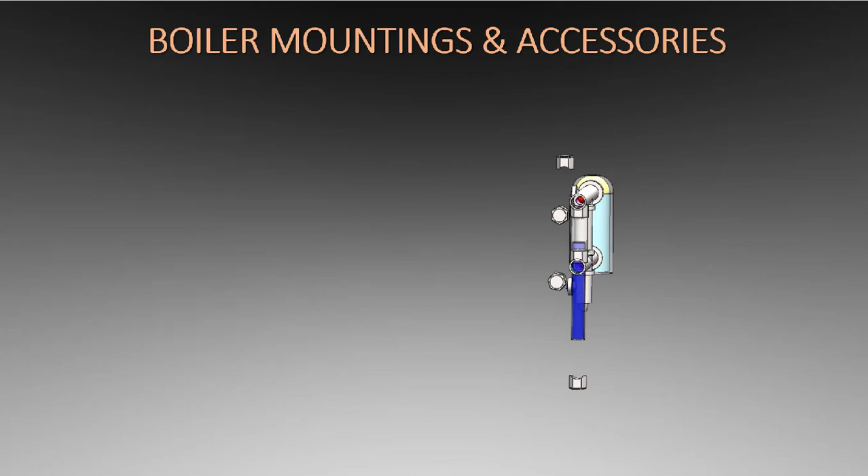We have already learned the uses of some of the mountings, and today we'll learn boiler mountings, boiler accessories, and one of the accessories will be discussed today, which is the water level indicator.

Let us define mountings and accessories first. Mountings are the installed devices for the safety of the boiler and also for the control of the boiler. Notice the two key words for mountings: safety and control.

Examples of boiler mountings are pressure gauge, water level indicator, fusible plug, etc.

Boiler accessories are the devices for efficient operation and smooth working of the boiler. Examples of boiler accessories are superheater, economizer, air preheater, etc.

So for mountings, it is safety and control, and for accessories, it is the efficiency or performance of the boiler. Mountings are required for safety and control, while accessories are required for efficient operation or performance of the boiler.

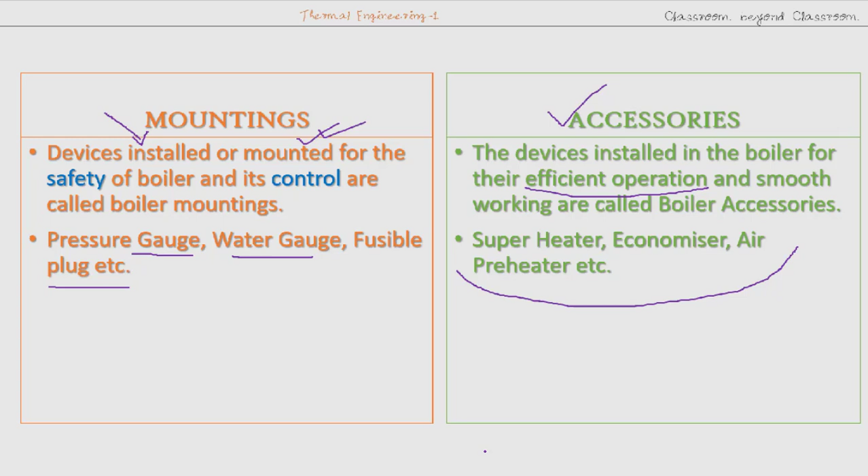Boiler mountings can be classified in two ways: boiler mountings for safety and boiler mountings for control. For example, water level indicator. Another is the safety valve.

Another example of boiler mountings for safety is the combined high steam and low water safety valve. If the level of steam increases and the level of water decreases, that will be indicated by this safety valve. This is a special safety valve for a boiler.

Fusible plug. These mountings are very essential for the safety of the boiler.

Other mountings for the control of the boiler include the pressure gauge. The pressure gauge indicates the pressure inside the boiler, and by monitoring the pressure, proper decisions can be taken.

Also, the junction or stop valve is a mounting for control. Similarly, the feed check valve is a non-return valve which allows water to enter the boiler but does not allow water to escape from the boiler. Blow-off cock and manhole are also mountings for control.

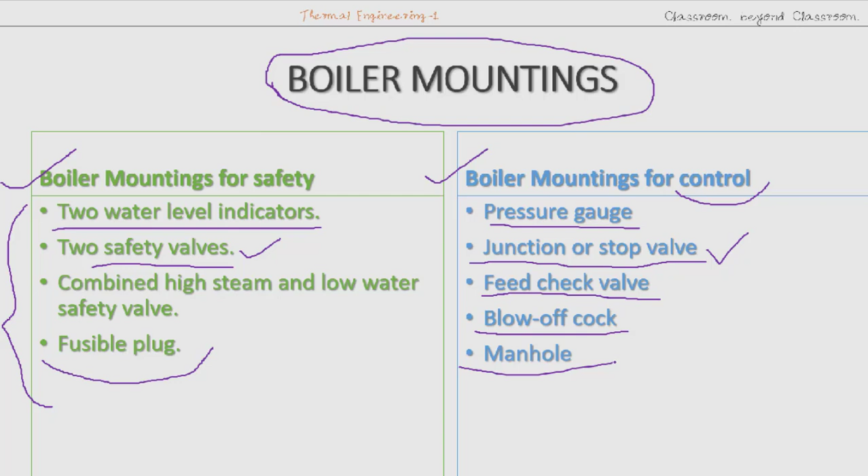So boiler mountings are for safety as well as control. All these fittings or devices are called boiler mountings.

Now boiler accessories. Examples of boiler accessories are the superheater, which produces superheated steam, and the economizer, which is used to supply hot water to the boiler as feed water by using the waste heat of the flue gases. Similarly, the same waste hot gases are used to heat the air which is supplied to the furnace.

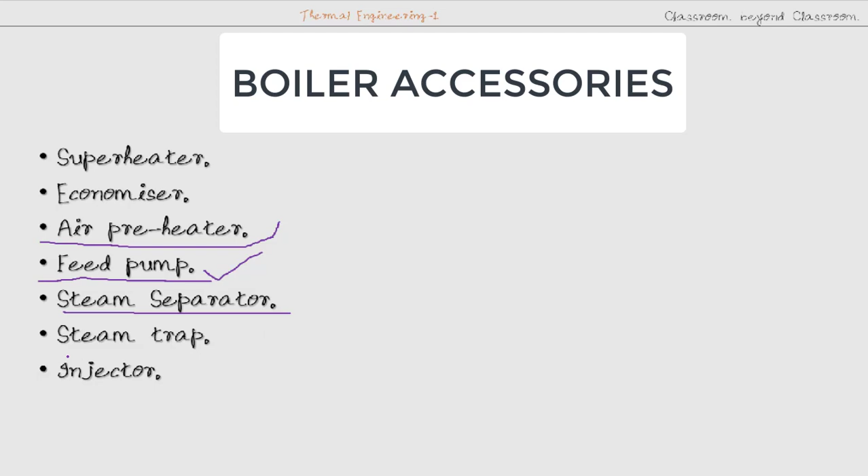The feed pump is used to pump water at high pressure into the boiler, at a pressure more than the boiler pressure. Other accessories include the steam separator, steam trap, and injector.

Let us understand the working of a water level indicator with the help of this 3D model.

This is the boiler plate to which the water level indicator is attached. The water level indicator consists of two horizontal tubes: one is for the flow of steam to the glass tube, and the lower tube is for the flow of water to the glass tube.

Both these horizontal hollow tubes are generally made of gunmetal. This vertical tube, also a hollow tube, supports both horizontal tubes, and it extends below, which is for draining water from the tubes if necessary.

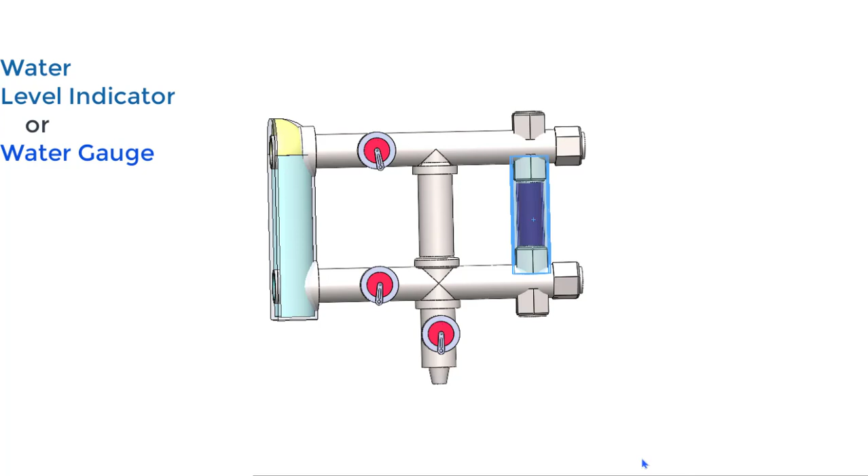This tube actually consists of two tubes. The inner, smaller tube is the glass tube, which contains the water as well as the steam. The outer tube is also made of glass, and it is the protective tube which protects the inner tube from any breaking, damage, or accident.

You can see there are three cocks: one on the steam tube and another cock on the water tube. The lower cock is to drain out the water from the tubes so that sediments and mud can be cleaned by blowing off the water from time to time.

At this position, both the water and steam cocks are closed, so water and steam cannot flow into the pipes.

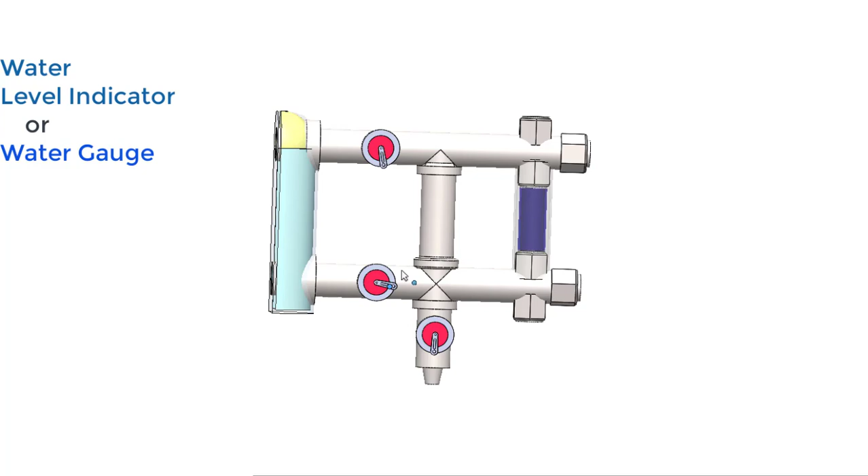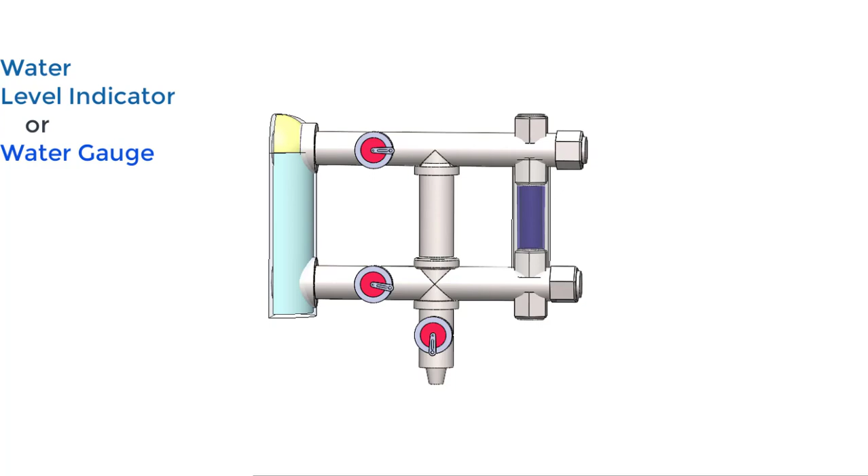Now both the water cock and the steam cock are open. You can see the steam and water can flow through these tubes to the glass tube. If both these cocks are open, then the level of water indicated by the glass tube will be the same as the level of water inside the boiler. At this time, the lower cock must be closed, otherwise the water will be drained out of the tubes and the level shown by the glass tube will not be exactly the same as that of the boiler.

These are the screw cocks which close the pipes at all the ends.

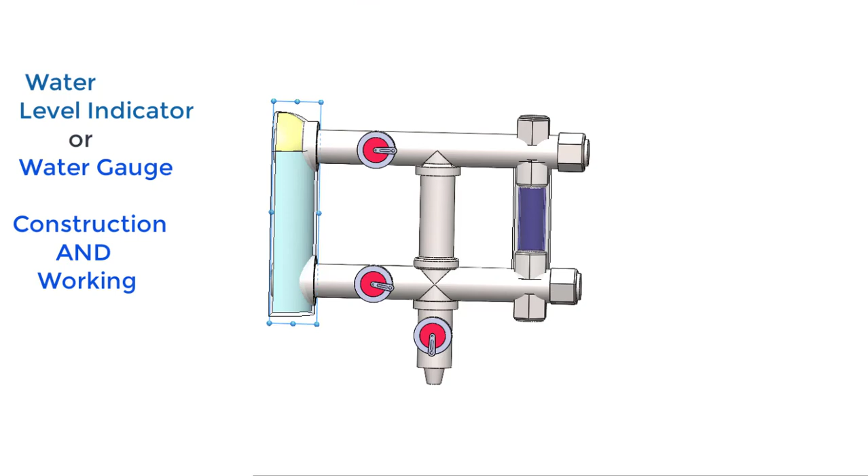Now let us see the cut section view of this water level indicator. Both the cocks at the water pipe and steam pipe are open, so the steam and water can enter into the pipe and ultimately go to the glass tube, and the water level will be the same as that of the boiler.

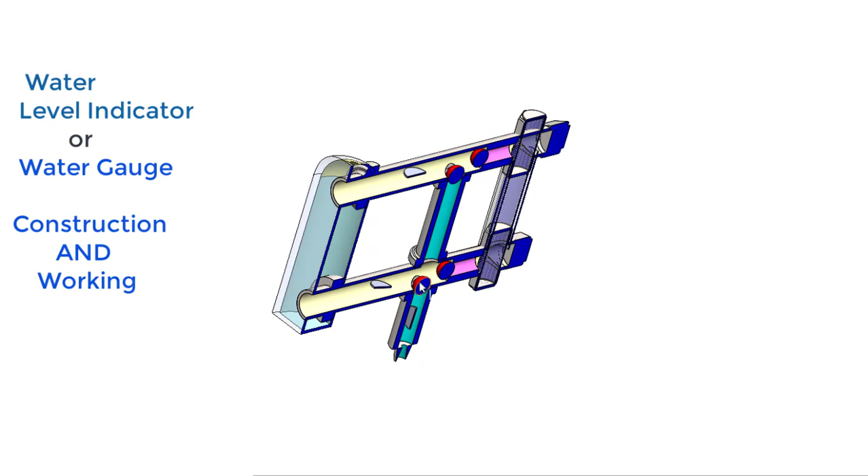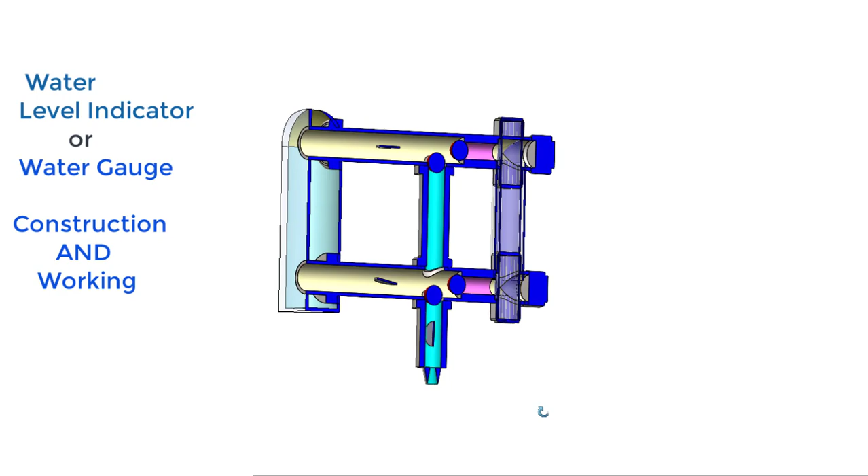There are two hollow steel balls, this one and this one, and under normal conditions they rest at this position. If the glass tube is broken, then these two steel balls will rush to this position and stop the flow of water and steam to the glass tube. So this is how a water level indicator works.

The function of a water level indicator is to indicate the water level inside the boiler. The water level inside the boiler cannot be seen because the water and steam are enclosed within a closed vessel. Therefore, a device is required to monitor the water level inside the boiler.

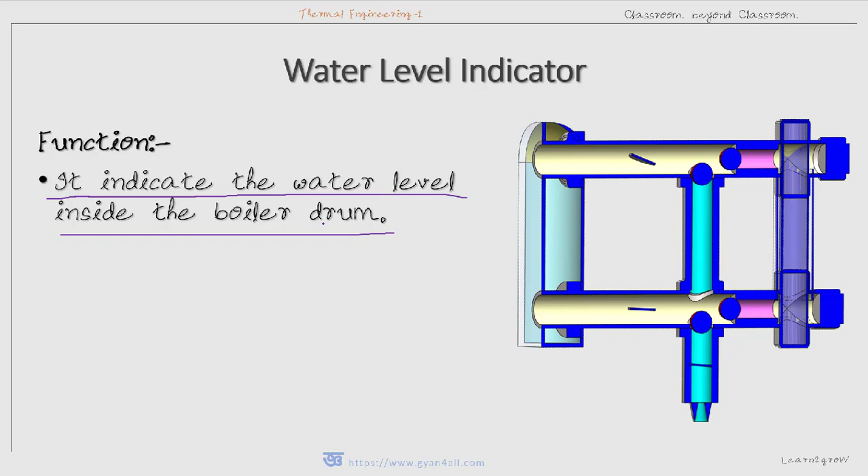The function of the water gauge is to indicate the level of water so that the attendant, called the boiler attendant, can regulate the supply of feed water into the boiler to maintain the correct water level. Normally, two water level indicators or water gauges are fitted in front of the boiler.

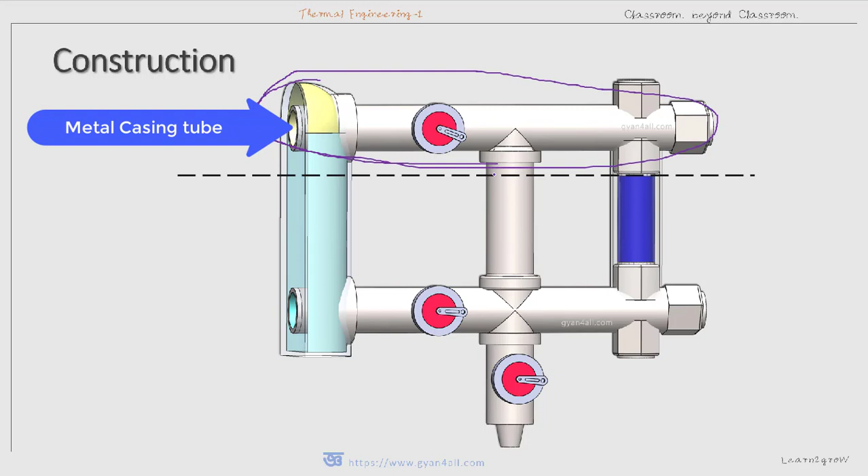Now let us discuss the construction of the water level indicator. It consists of two horizontal metal casing tubes, upper and lower tube. This is the upper horizontal tube and this is the lower horizontal tube. The upper tube is fixed to the steam space and the lower tube is fixed to the water space.

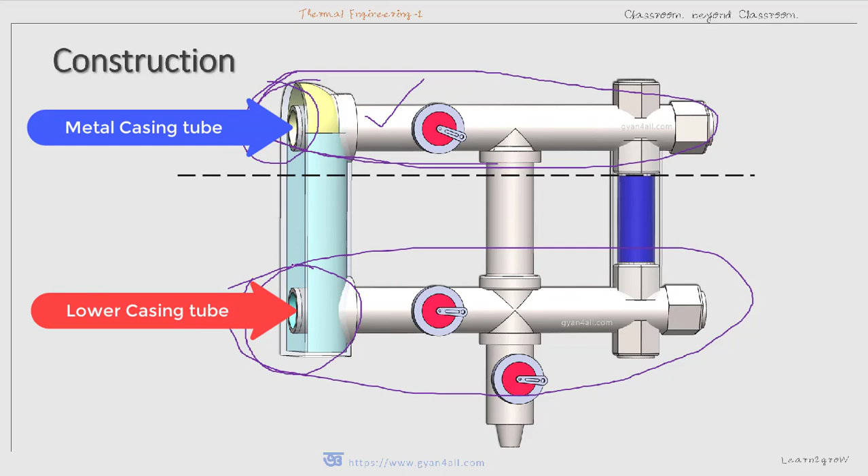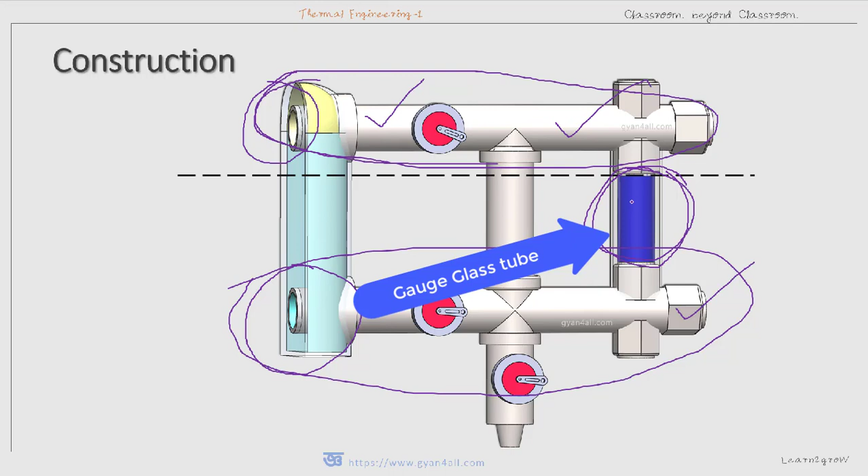There is one gauge glass tube, having a guard cover, fitted between two hollow gunmetal casing tubes. These are made of gunmetal, and this glass tube is the gauge tube. The inner one is the gauge glass tube and the outer tube is the protective tube.

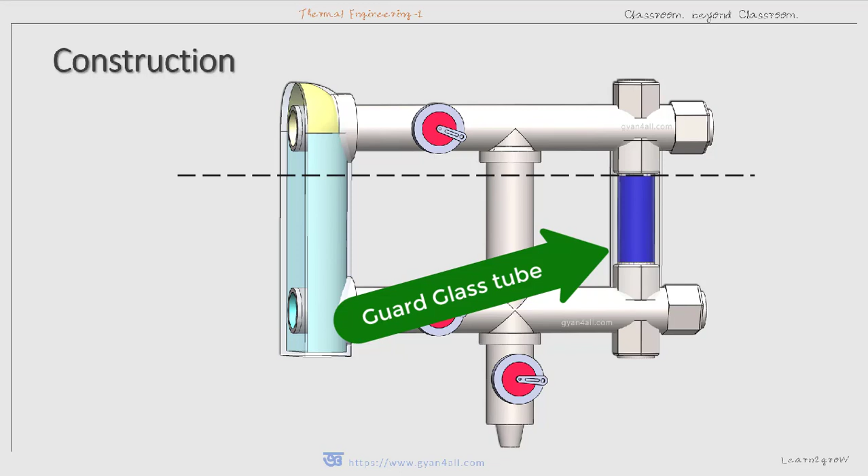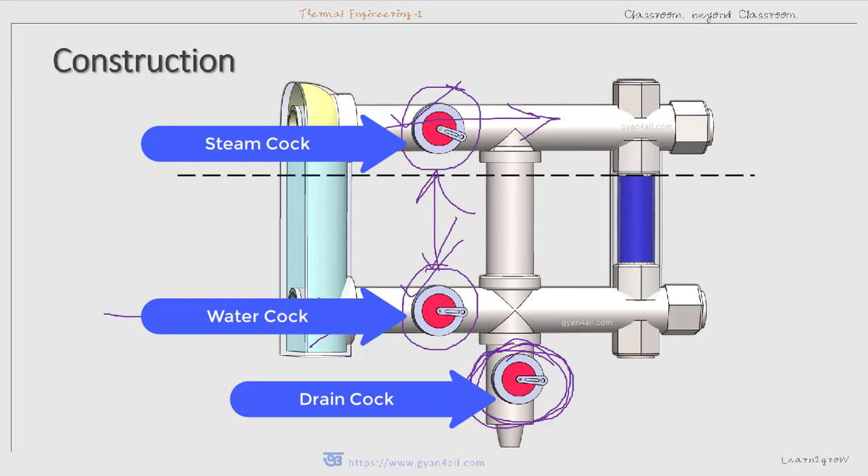The water level indicator has three cocks: cock 1, cock 2, and cock 3. The upper one is called the steam cock, the lower one is called the water cock, and the bottom-most one is called the drain cock. These two cocks control the passage of steam and water, and the third one is used to drain out the water from the system to clean the tubes periodically.

This is the boiler plate, part of the boiler water drum. And this is the level of water inside the boiler as well as inside the inner glass tube. The water can enter through this tube and steam can enter through this tube.

These two tubes made of gun metal are called the casing tubes, hollow casing horizontal tubes.

These are the three cocks C1, C2 and C3. C1 is for controlling the flow of steam. C2 is for controlling the flow of water to the glass tube through the hollow gunmetal casing tube, and cock C3 is to drain out the water for cleaning the tubes so that mud and sediments cannot deposit inside the inner glass tube.

This one is a metallic hollow tube which supports both the horizontal tubes, and this is also a hollow tube, through which water or steam can flow from the upper tube to the lower tube or lower tube to upper tube.

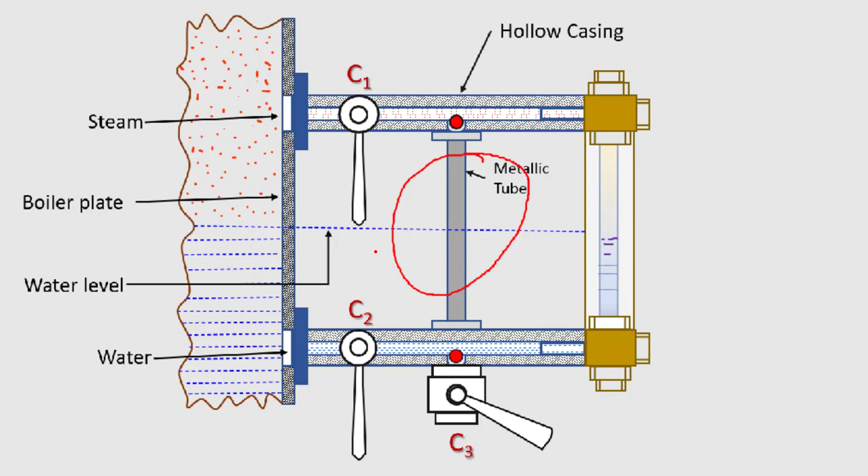Outer tube is called the guard glass tube, which protects the inner glass tube. Inside are two hollow steel balls which generally rest in this position, and in case of breaking of this tube, the steel balls take a new position, stopping the flow of steam and water to the glass tube. The inner glass tube is also called the gauge glass tube, through which we can monitor the level of water inside the tube.

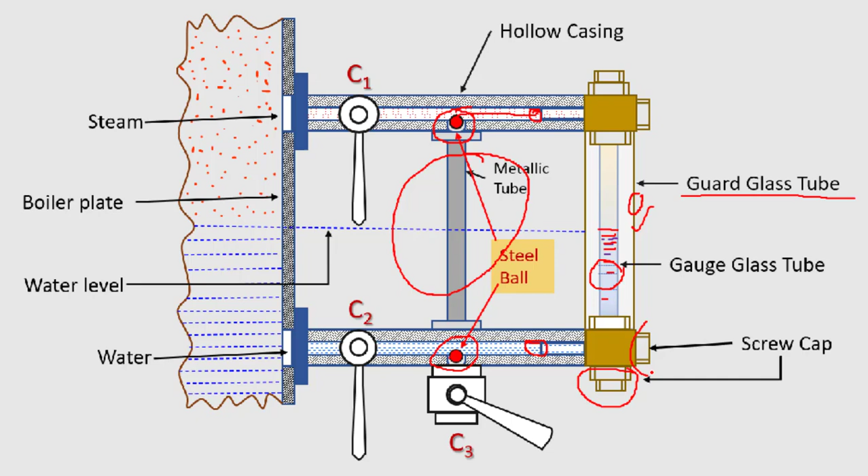The gauge glass tube indicates the water level inside the tube, which is also the level of water inside the boiler. These are the screw caps to close the flow of water from the tubes. Steam comes from the upper tube and water comes from the lower tube. The yellow color represents the steam, and the light blue color represents the water.

During operation, and for observation of water level in the boiler, the steam and water cocks are kept open and the drain cock is closed. C1 and C2 must be open and C3 must be closed for operation or observation of water level. If that is so, the water level inside the boiler will be the same as seen in the gauge glass tube.

The drain cock is opened at regular intervals to discharge water, to avoid accumulation of mud or sediments in the path from boiler to glass tube.

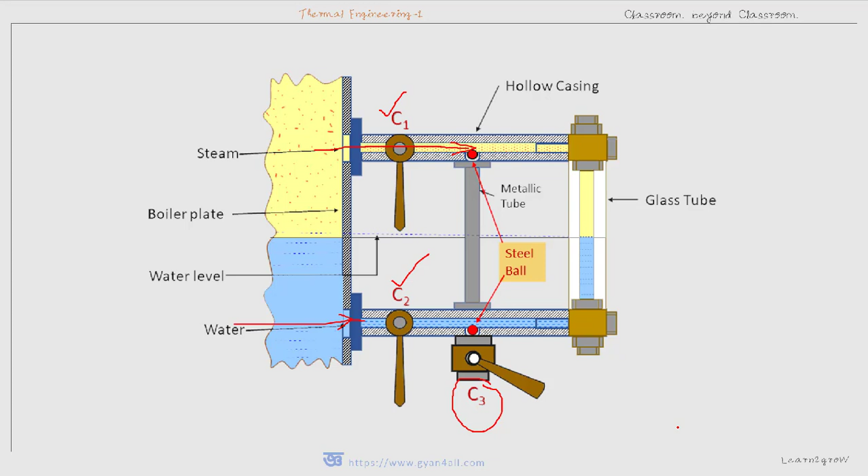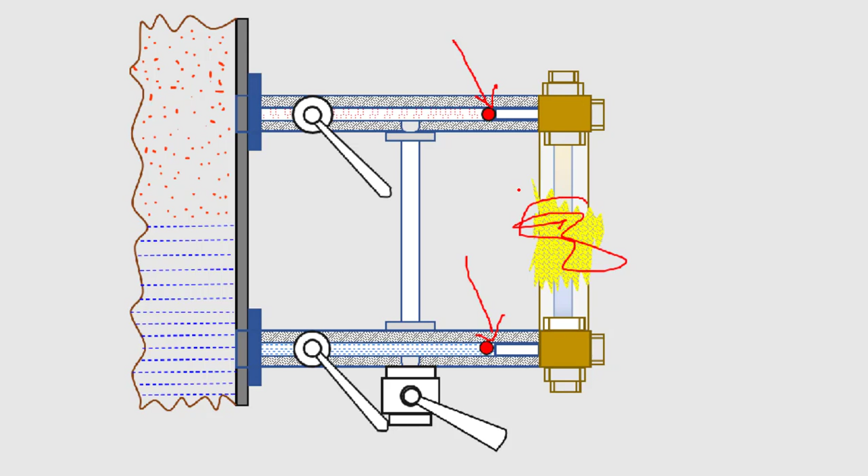In case the glass tube is broken, these two steel balls will take a new position. That means the two small metal balls inside the upper and lower metal casing tubes rush towards the glass tube, and the steam and water supply are shut off to the glass tube. If it is broken, due to the pressure difference, the ball will take the new position in both passages, for steam as well as water.

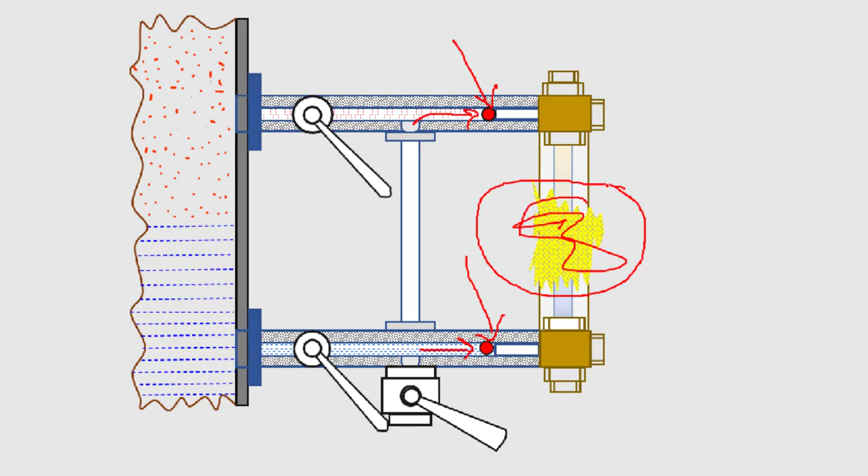So in such a situation, if the glass tube is broken, what should be done? In that case, the steam and water cock has to be closed and the glass tube is replaced to resume normal operation of the water gauge.

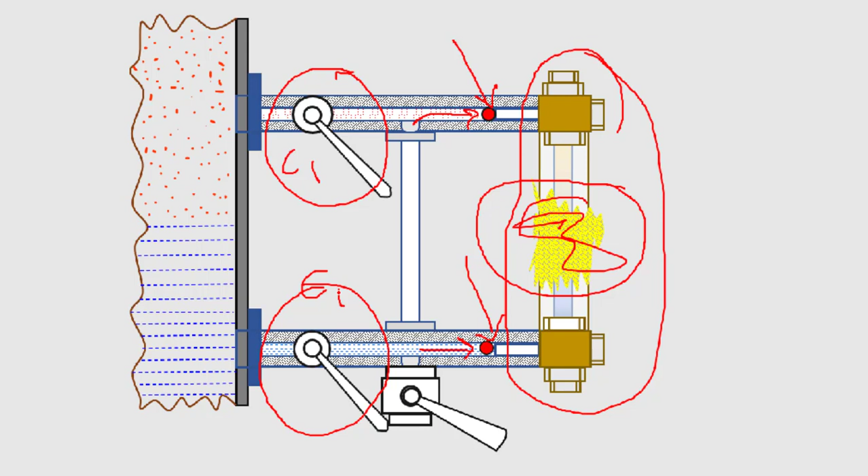By closing the cocks C1 and C2, this glass tube can be replaced. After replacing, the cocks C1 and C2 have to be opened again and normal operation of the water gauge can be resumed. So under normal condition, this is the position of the steel ball at the upper tube and this is the position of the steel ball at the lower tube.

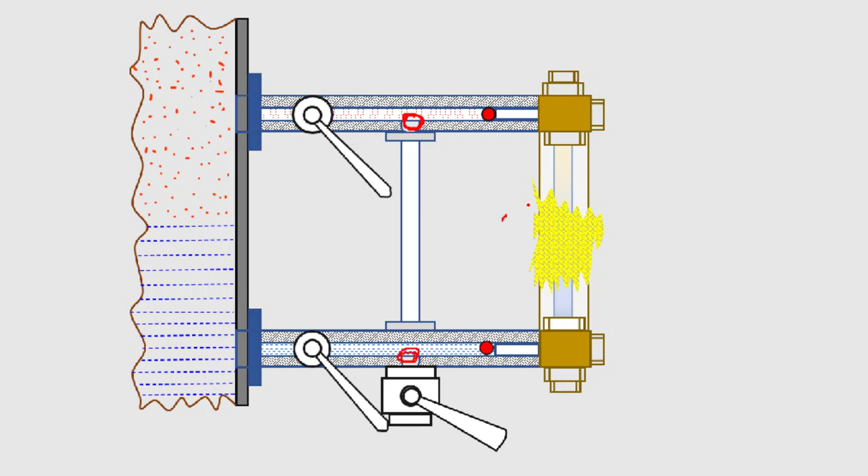At this condition, they rest in this position because the pressure exerted on the ball is the same from all sides, so it will not go to the glass tube side. It will remain in that position, and only if the glass tube is broken will the pressure at this point be lower than the pressure inside the boiler. In that case only, the ball will move towards this side, and that way the flow of steam as well as water will be stopped to the glass tube.

From this diagram also we can understand: in case the glass tube is broken, this steel ball will take a new position, and this steel ball will take a new position. So the flow of water and steam to the glass tube is stopped, and at that time this cock and this cock have to be closed to replace these glass tubes. After replacing, only these two cocks, C1 and C2, have to be opened.

So I think this is enough for today. The principle of the water gauge is very simple. It's a combination of tubes only: two horizontal tubes, one vertical metal tube, and two glass tubes - one inner tube and one outer protective tube.